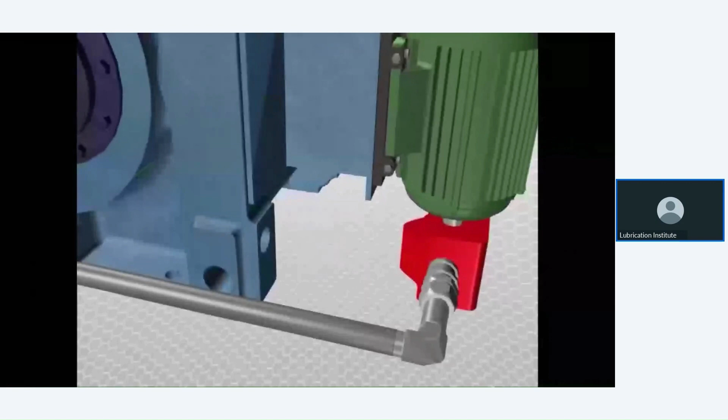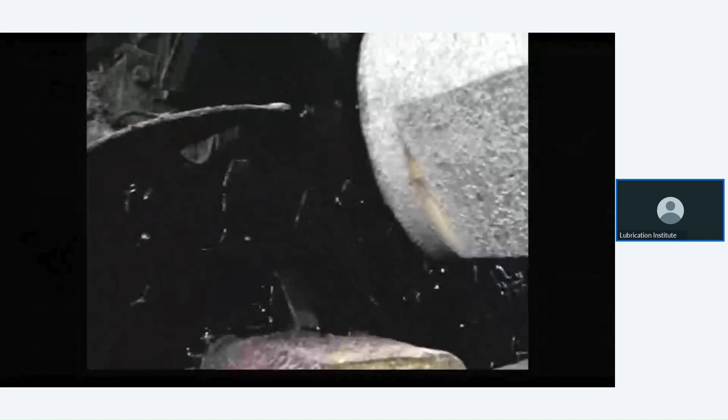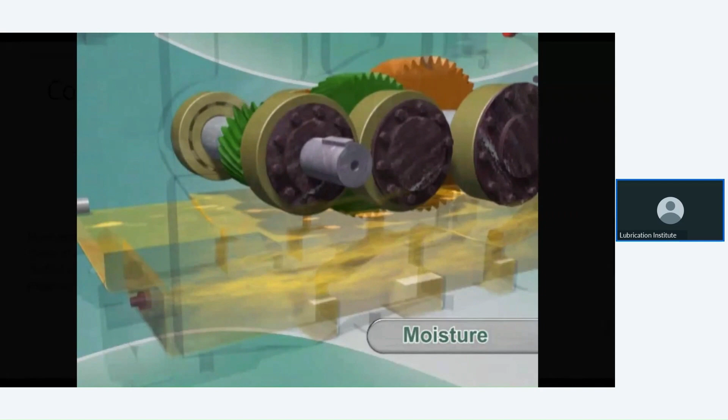Good afternoon, everyone. The idea of these coffee break webinar sessions is to give you some small important thoughts, especially related to lubrication reliability. Today's topic is about contamination control, and how it builds reliable operation of your equipment. Fluid contamination control targets the primary cause of wear and lubricant failure. This is the central strategy, or proactive maintenance approach, to control all contaminants, thereby keeping a clean lubricant that provides proper lubrication for a longer time and protects your components from wear, friction, and other possible impacts.

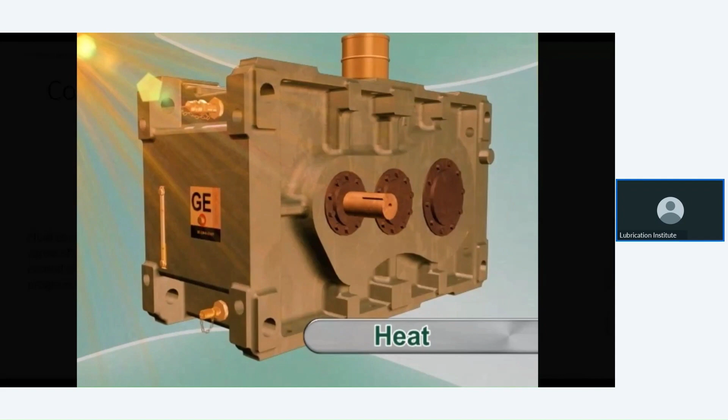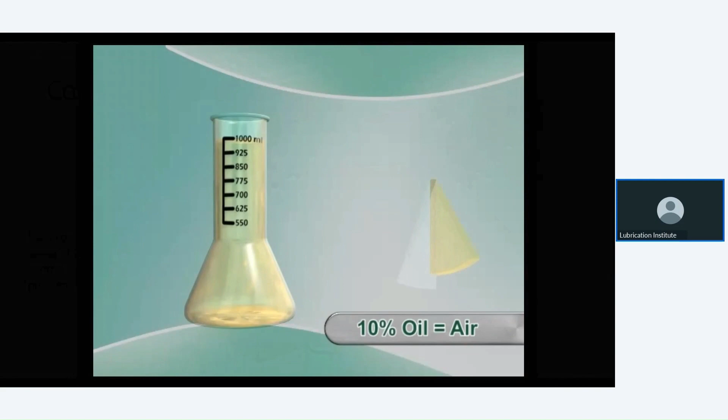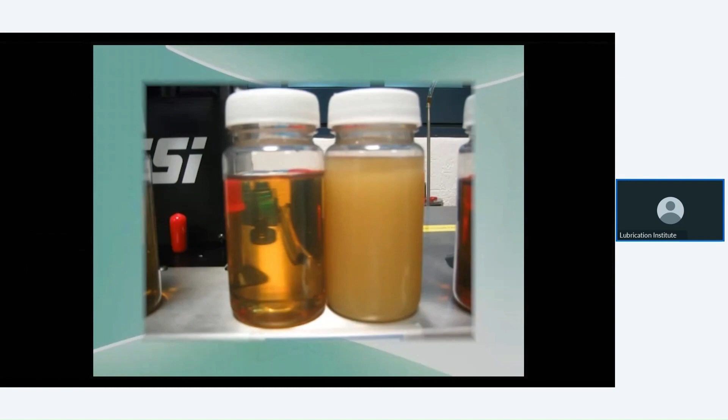So what do we call contaminants? Particles, moisture, fuel contamination, coolant contamination, even heat and radiation. These are also considered contaminations. Even other lubricants mixed with your existing ones are contaminants, which leads to incompatibility of the lubricants and creates physical and chemical characteristic differences in the lubricants.

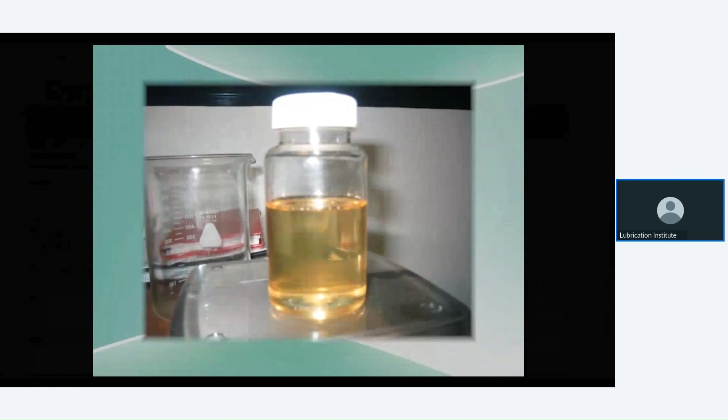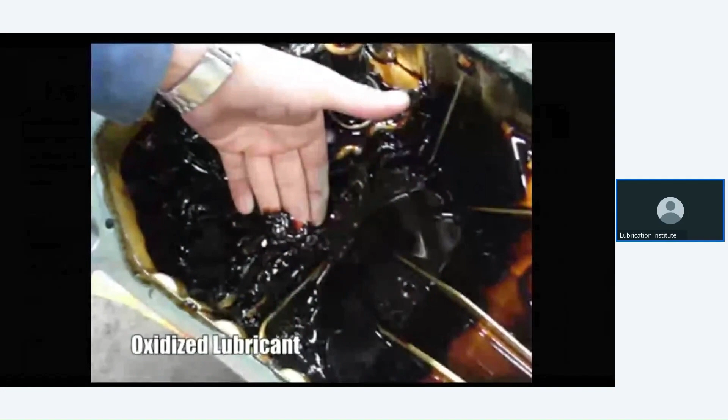So how do these contaminants damage your lubrication and machine components? Although various contaminations exist, water is the most common contaminant. Particles too are among the most common contaminants, coming from the environment and from operational and process related sources. All these continue to add up to your lubricants, changing their physical and chemical properties, and further changes will take place as a result.

Take a simple example of water contamination. Water contamination leads your lubricant to an oxidation state. Water reacts with your antioxidant additives, depleting them very quickly, and makes your base oil oxidize rapidly. Once oil gets oxidized, its viscosity increases, emulsions form, and sludge contents form. All these allow your lubricant viscosity to increase from its original level. So the increased viscous film may not reach the contacts properly in time, leading to viscous drag in the lubrication, and components will wear and tear, with internal friction also increasing.

Once oxidation starts, there is a rapid increase in acidic formation because of additive depletion, and water contamination directly leads to rusting of your machine surfaces. Free water contamination can potentially lead to cavitation problems and scuffing related issues on component surfaces. If you observe all these contaminants listed here, every contamination is driving your lubricant to get oxidized. Either it makes your lubricant lose its additives rapidly, leading the base oil to become oxidized, or once it becomes oxidized, you will see changes in physical and chemical properties, and there's a direct and indirect effect on the machine components as well.

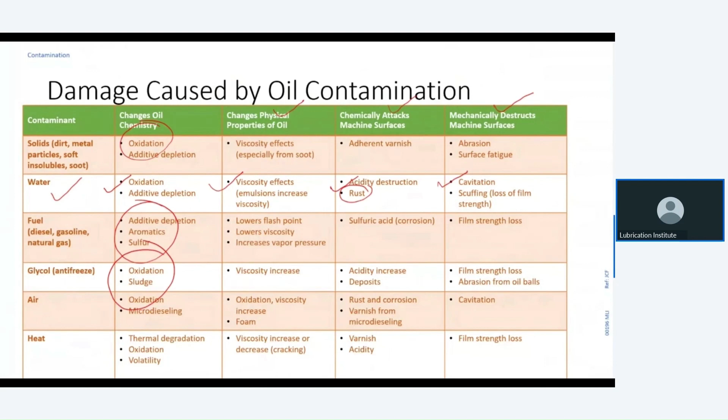This is the reason why we need to control contamination, and that forms the central strategy of reliable maintenance. Okay, so let us look at a case study from Nippon Steel Corporation, one of the very renowned steel companies in Japan.

They had very huge failures at one point of time. They were having a higher number of failures and identified that many of these failures were connected with contamination related problems. So they made an action plan to set cleanliness targets for every type of equipment. They provided sampling ports for proper collection of oil samples for further analysis. They improved the existing filters and breathers, and bought an on-site particle counter for understanding particle counts on a live basis.

Initially, as this action plan was progressing, you could see some hiccups. Sometimes there was a decrease in failures, but then a sudden steep increase in failures, yet they did not stop and continued to follow this program. As the program evolved over a period of time, you could see tremendous changes. The failures constantly reduced, and over a 5 year monitoring period, the failures reduced from almost 80% down to close to 20%.

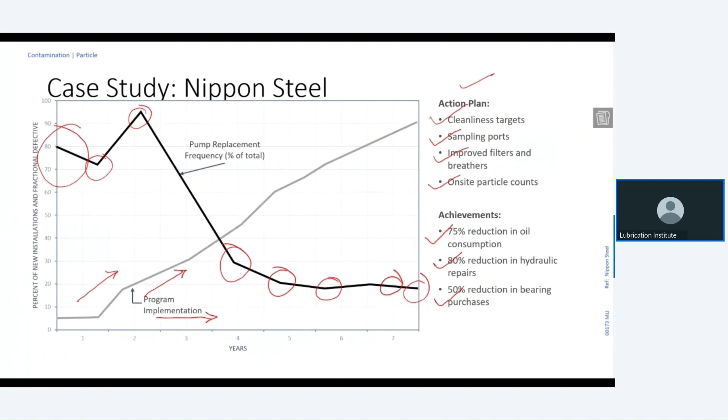Another case study from Kawasaki Steel: the pre-contamination levels were 100% for fluid consumption levels and breakdown percentage. Once they started an action plan similar to Nippon Steel, with cleanliness targets, installed off-line filters, and on-site particle counts to measure and confirm they're maintaining the systems at proper cleanliness levels.

Over a period of 5 years, in year 2 itself you can see a 57% reduction in fluid consumption and 75% reduction in breakdown frequency. Over the full 5 years, they could achieve only 20% of the fluid consumption compared to what it was 100% 5 years ago, and only 4% of the breakdown frequency.

There is absolutely no rocket science here. The ultimate objective of contamination control is to make your oil free from all contaminations. A lubricant, whatever way it was produced, it has to remain that way in your system, right?

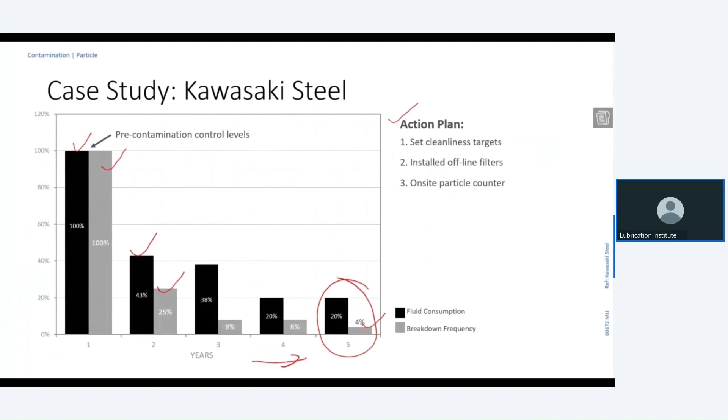Now, another interesting case study from the National Research Council of Canada. What actually drives your machine components to fail? Is it particle-based contamination or non-particle-based contamination? This study was conducted on about 4,000 different equipments from different industrial sectors like pulp and paper, forestry, mining, agriculture, power generation, transportation, and various industries.

They found 82% of the failures are related to contamination, connected with particles. 18% are non-particle based contamination, which could be because of improper oil usage, lubricant degradation in service, or chemical byproducts generated as a result of lubrication related issues. So what makes your machine fail?

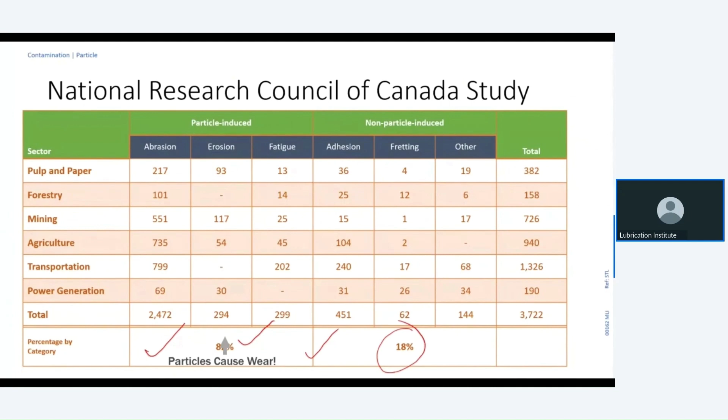Particles. Particles are the major concern which can drive your machine or components to failure mode, right? So particle contamination is what we can always consider as the cause and effect of wear. They cause the machine components to generate wear, and they are also the effect of these particles—the wear rate, the wear generation or wear particles that are generated—again contributing to the secondary wear of your components.

Failure-inducing particles like abrasion particles, erosion particles, surface fatigue related wear and tear, denting related particles, and so on—they continue running along with your oil, and they continue to gouge the surfaces, scratch the surfaces, and further generate more and more subsequent wear.

So what is happening? Particle contamination is the root cause of component failure, and the effect of this root cause is also contributed to by the amount of particles there.

So predictive maintenance approach always looks at removing these particles. The moment we find a NAS value or ISO contamination cleanliness levels are high, we always look for a solution to remove the particles. But if you practice a proactive maintenance approach, we always look for the sources of where these contaminations are coming from, and then work on controlling the contaminations getting into the system. Practicing this proactive maintenance builds your central strategy for improving reliability through contamination control.